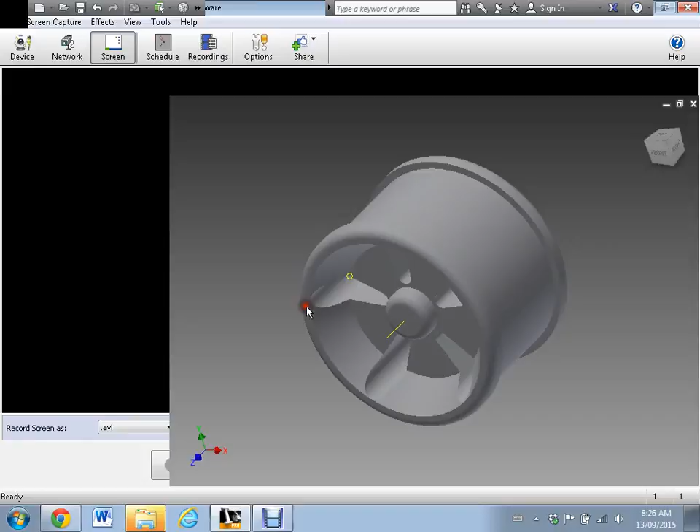This is a tutorial on how to get from Autodesk Inventor 2013 to the MakerWare software for MakerBots, to be able to 3D print your project. This is just the wheel that we've created in the first set of tutorials. So what I want to do is get into that MakerWare software.

Before I do that, there's a couple things I want to show you. On the tabs tool up here, typically you're in the 3D model one. We're going to go to Tools, then Document Settings, and what we're going to do is change the units. You can see it's in inches right now.

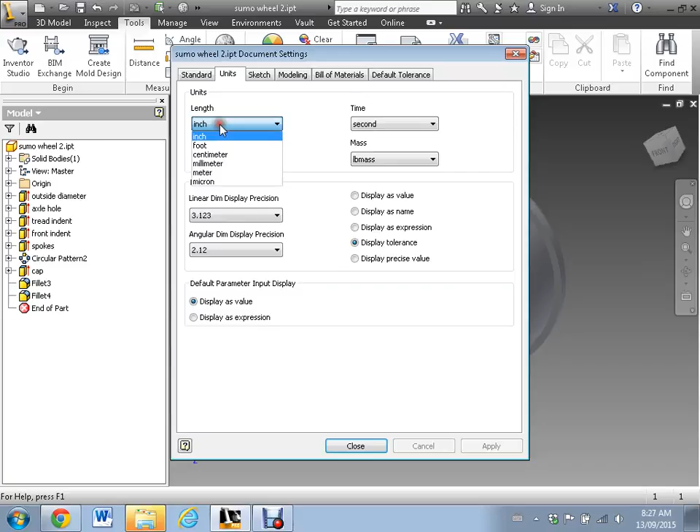If I go to Distance, and across the top distance here, you can see it's 1.5 inches. So if I go to Document Settings, Units, and change that inches to millimeters, I'm applying all the changes to this entire file now. When I measure now, you'll get 38.1 millimeters, which is equivalent to 1.5 inches. The reason we're doing this is the MakerWare software likes millimeters versus inches. It still works, but it's just easier to transfer over.

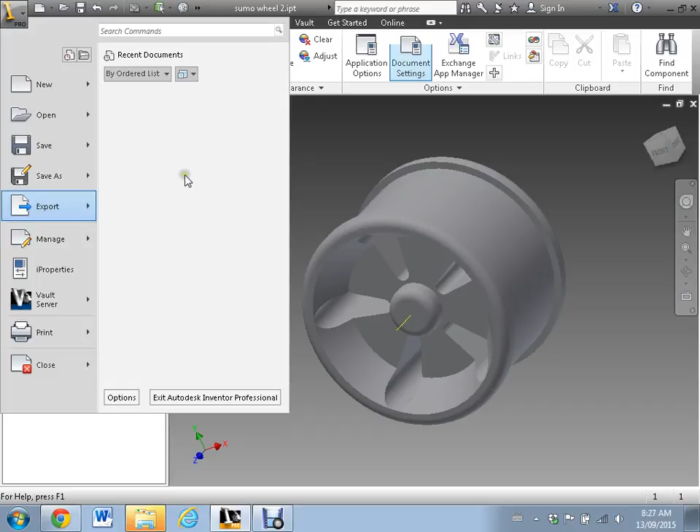Next, what we're going to do is come up here, and on the dropdown, we're going to go to Export. And Export, we're going to do CAD format, and this is very important, so you've got to be CAD format. Then a screen's going to come up. I'm going to go to Preview right now, and what you're going to see is this is what it's going to export as. If I go to this, you can see these facets, there's 1,842 edges to this.

What we're going to do is I'm going to play a little bit with this. If I go to Low right now, you can see there's a few more edges there now, so it's not as smooth of an object, but the facets have come way down. If I go back and take this to 100%, you can see there's a lot more edges to it. Depending on what you're doing, you might play with these numbers a bit.

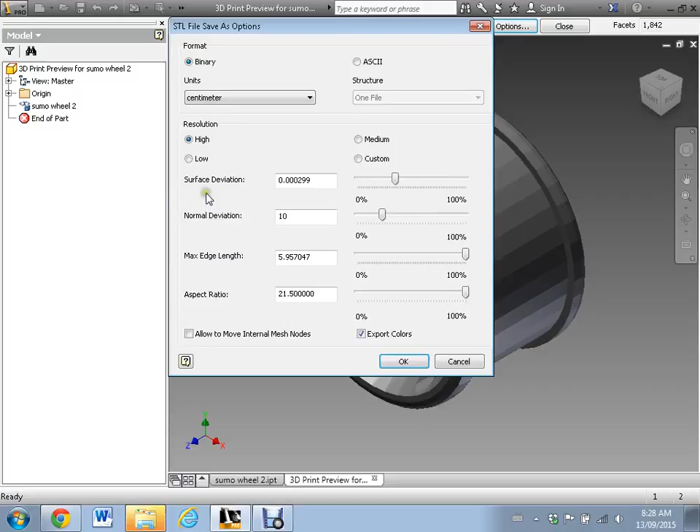I'm just going to go back to Options, and go to High and leave it at High because we want a smooth surface. The last thing before I get out of this is, see the units here? It's centimeters. So it's going to convert from millimeters in the project you've done to centimeters when it exports out, which is going to mess you up when you get into the MakerWare software. So I'm going to make sure this one's millimeters. You can see I can have it in inches too, but I'm going to use millimeters, so everything's millimeters all the way across.

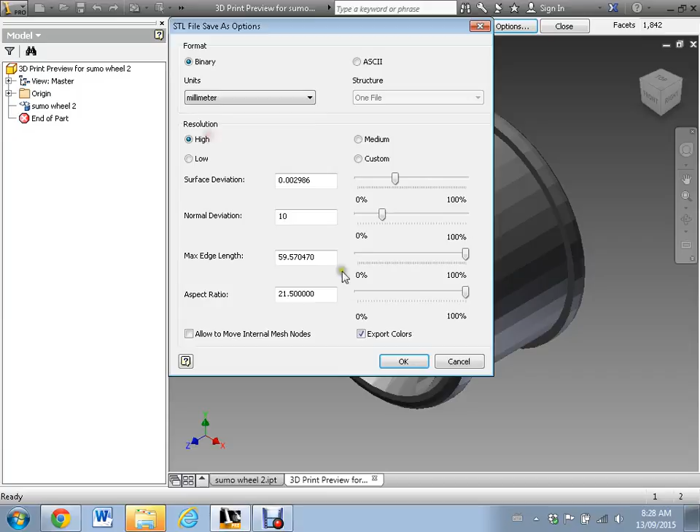Nice and smooth now. I'm going to close out of this preview screen, and I've got my Sumo wheel name. I got my stereolithography file - that's the file format we have to use. Make sure it's stereolithography, otherwise it doesn't work - STL. I'm going to click Save, and away it goes, it's done.

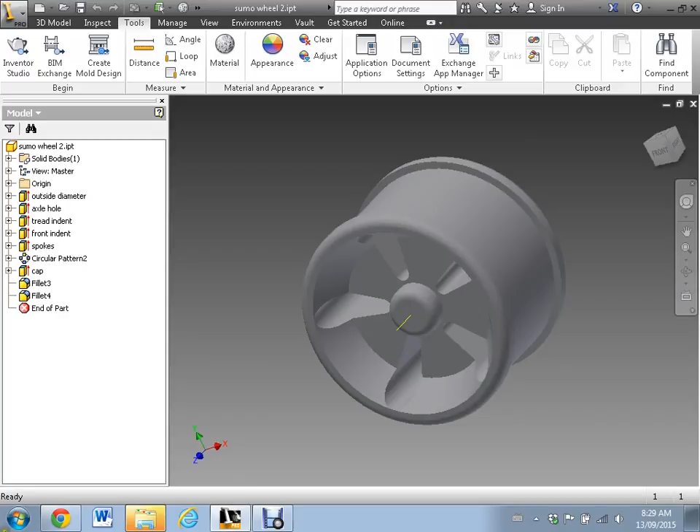Now I'm going to get into my MakerWare software. Start button, all programs, and I'm just going to scroll down to MakerBot - you might have to put this on your desktop after - and it will start up. The first time it starts up, it might look something like this.

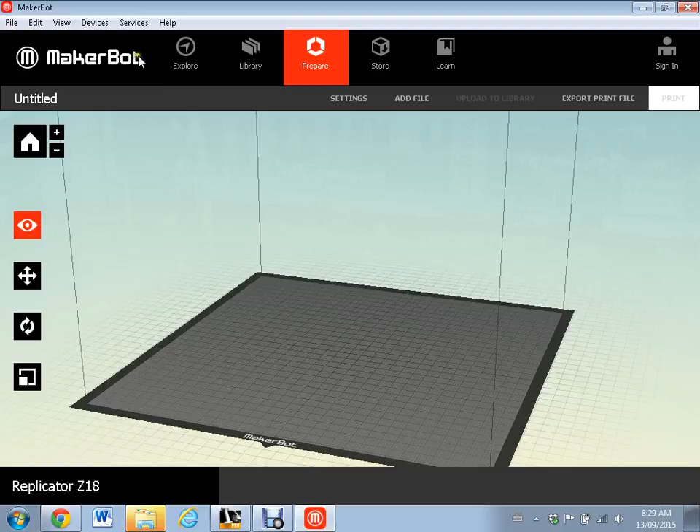The screen you want is right here, it's called Prepare, so you click on Prepare. It opens up like this. This is the build platform for your 3D printer now. In this, though, I've got to make sure I have the right device, so I'm going to come into here and select type of device. I want Replicator 2 - we have Replicator 2s in here, not any of these other ones.

You have to make sure it's this. So there's the first thing we're going to do. Second thing is under Settings.

Okay, this is very important. Number one, what are we going to do here? Quality-wise, we can go high, medium, low. I'm going to go to high just to see what it does, so you can see how certain numbers change. I'm just going to make a custom one up.

Quality is basically how thick or how structurally sound the object is. Depending on what you're doing, you have to or don't have to actually make an object structurally sound, or very dense. So in the wheels, you really don't need to have it that dense.

So what we're going to do is change some numbers. The raft builds a support on the table first and then builds your object on top of it. We don't need that. Support - what happens if you're drawing something that goes up for a while and then has to go straight out sideways? You need to support it because you can't print in thin air. But there's nothing in your wheels for this, so we don't need support on.

Layer height - this is how much the 3D printer moves every time it goes across. I'm going to leave this at 0.2 for this project.

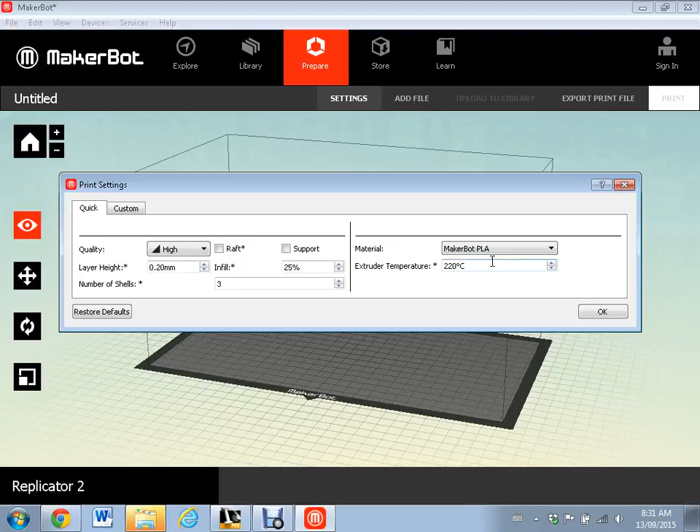And those are the settings. So that's all set. You shouldn't have to change that ever again.

Okay, finally, File, Open. In your directory, you'll go find it on the network. Mine, I just have it defaulted here. I'm going to take my wheel and bring it in. You can see it's coming in.

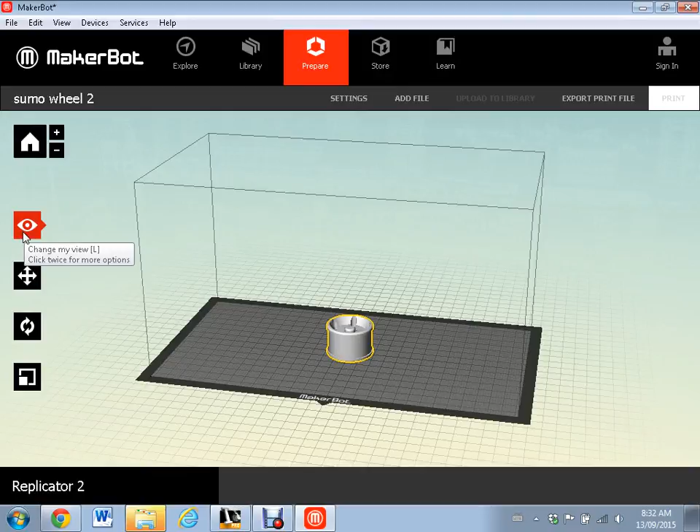I'm going to say move to platform, and it makes it level. I can just take my mouse right now because this is the look tool, or change view. I can look from the top, scroll around, move it right, scroll in, scroll out. You get the point. So there's the first one.

I'm just going to move it up kind of like this. I can move it around, and you can see you can move it by set distances, or I can just grab it and drag it and move it around. So I'm just going to move it off to the side like this for a bit.

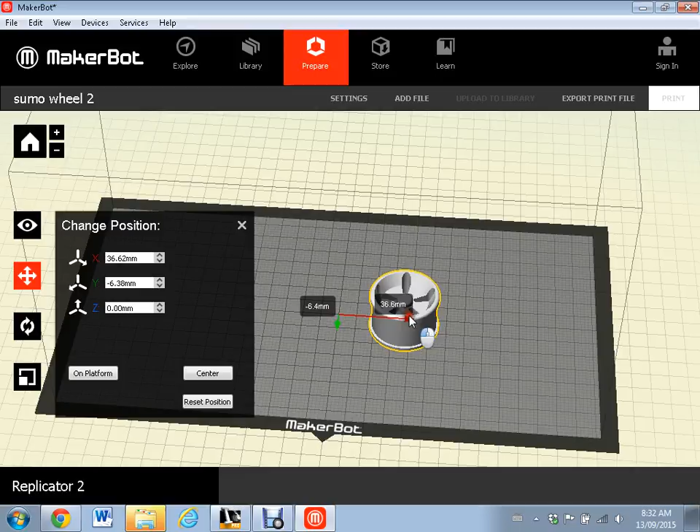You can rotate. So if it comes in the wrong way because you didn't do the top surface versus front, back, left, right, or top side views, you can move it around. You can see I can get it screwed all up, and I can just go back to reset rotation.

And here's this lay flat - make sure it's on a flat surface. So I want the surface that is completely in contact with the bed to be down, so that it can't print in space on this project. So the wheels, the axle hole in this case is going to be down.

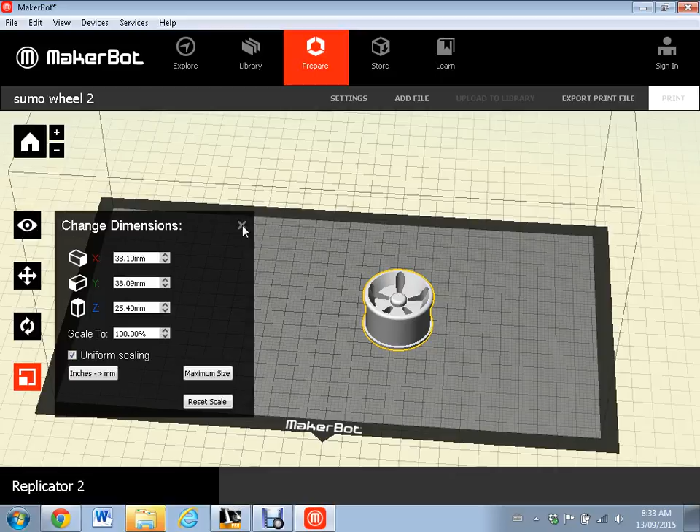And finally, scale - we don't need to change any scaling because we converted it beforehand, and there's your 38.1 millimeters. So that's done. So there's the first one. Now I want two wheels right away, so I can Control C, Control V.

I can go to Edit for copy paste. So I'm just going to go Control and C to copy it. Whoops, I have to select it first. Control C to copy it, Control V to paste it, and I get another one. And I'm just going to move that one. Okay, oops, I don't need that screen. I'm going to move this one over here.

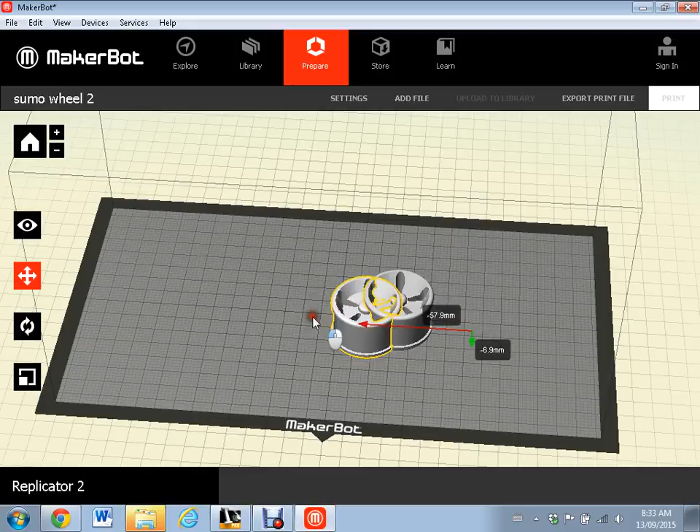And I'm going to look from the top view. I'm going to click here, go top, and hide that. And I'm going to zoom in a bit. And what I'm going to do is move these so they're quite close together. They're not quite touching, but they're close together.

Because if you think about it, the MakerBot and the little head is going to 3D print these. So if one's over in this corner and one's in this corner, it's going to take a lot longer to have to go back and forth. So leave things close together, just not touching. The other one is tend to leave them in the center. It kind of works best when it's in the center.

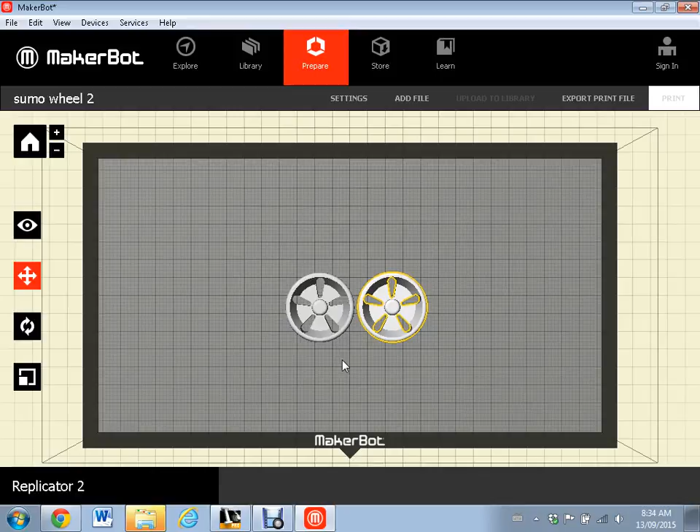So there's my files there. Okay, whoops, I'm still in move. So let's just do that. Let's go back to look. Okay, and now I'm ready to actually export them. So my settings are set. My things are there, they're laying flat on the bed. So I go to export print file.

Okay, and it's going to take a couple seconds, maybe 10, 15, 20 seconds, depending on how many sides you have, how big of a project it is. This could take 2-3 minutes, right? All depends. But I'm looking at right now my resolution, my rafts, my supports, they're all off. That's what I want, right?

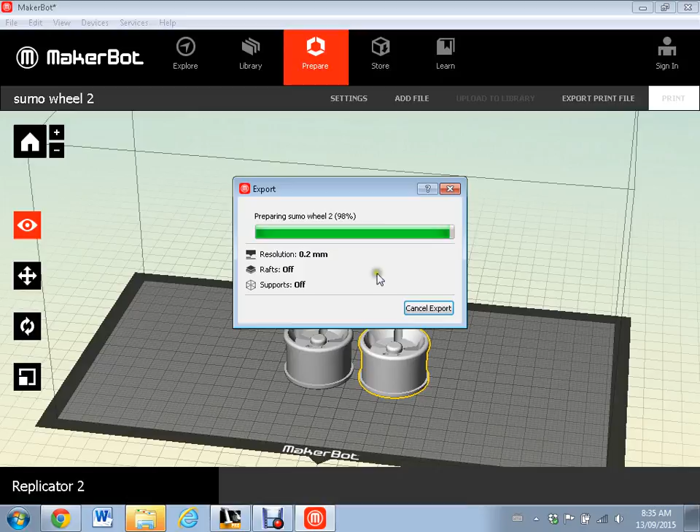And when I'm done, it's actually going to show you what all the build statistics are going to be. So it's actually going to tell you how long it thinks it's going to take, and how much material it's going to use. There we go. So here you can see, it's ready to export.

Print time about 2 hours. So those two wheels are going to take 2 hours. How much filament? About 30 grams of filament. Well, that's at 5 cents a gram, that's $1.50's worth of material, right? And then the rest of the stuff, and we can just go export now.

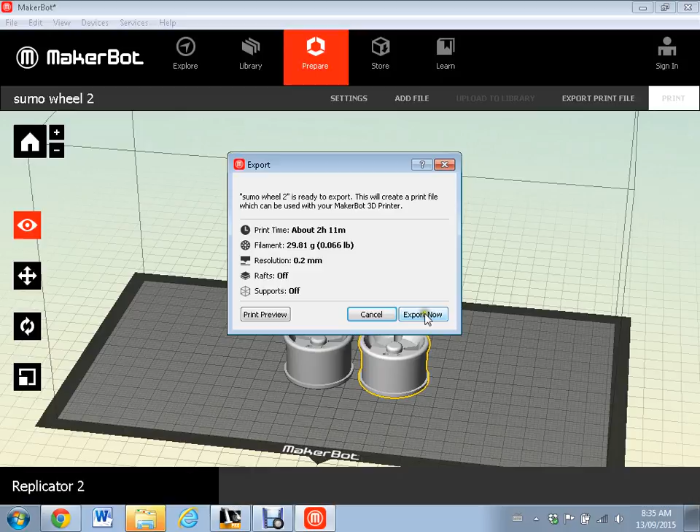Okay. And if you go back to my computer, you'll see down here, I got a removable storage device here. So I have a 2 gig SD card. They cannot be more than 2 gig. If it is, that doesn't work. So I'm just going to go to here. You can see that I've already saved one once.

The naming convention I want you to use is going to be your first name, then a hyphen, and then what it is. So that way I know it's your project. So if I have to print this later in the day or at night, I can find your file, and you simply hit save.

And in my case, I can hit replace, and you can see in the top right corner here, it's now saying print to file. So it needs to go through this and actually print this to the file, and this could take a little bit. You can see how slow it's going. A bigger project, it could take 5 minutes or so.

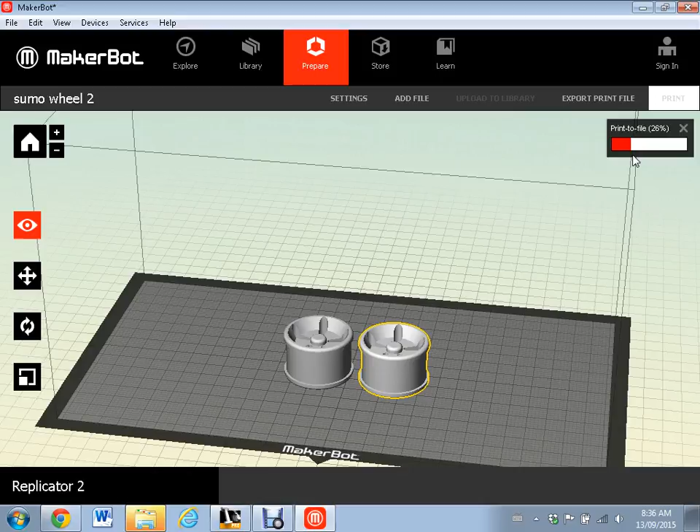Okay, so I'll stop here. Once it's done, it's exported to the SD card, and then the next tutorial would be how to go and use a 3D printer. And that's the end of the tutorial.